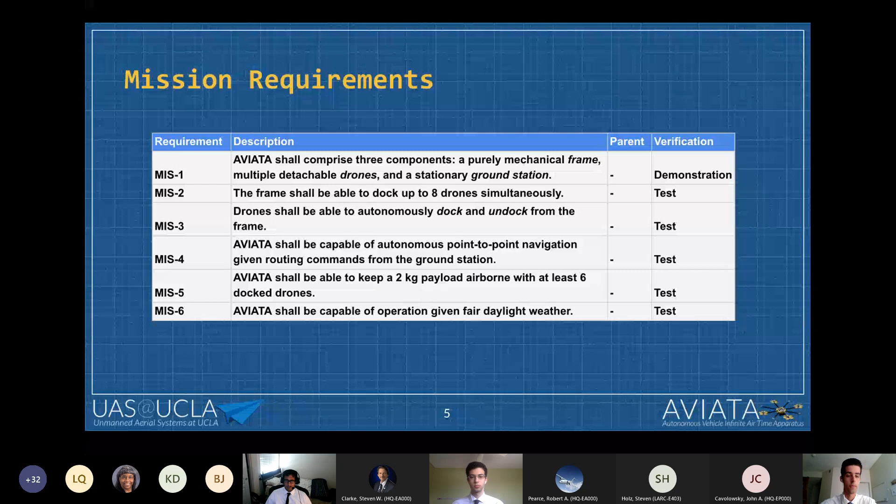In terms of how we organized ourselves, we broke it down into 4 main sub-teams in order to address each of the major issues more accurately.

The airframe team was responsible for the mechanical engineering of our unique structures. The control sub-team was in charge of handling stable flight control of rigidly attached drones, which affects the control of flight.

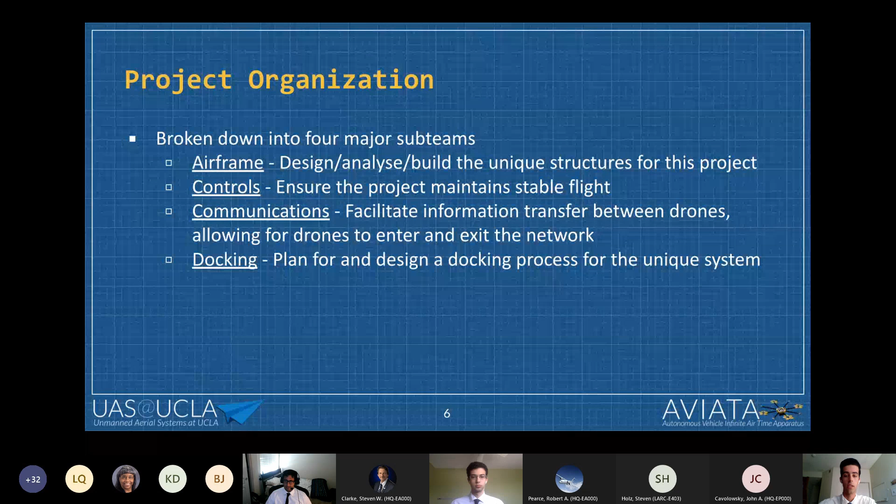Communications was in charge of facilitating information transfer by administrating a network for the drones to communicate with each other. And finally, the docking team was in charge of designing and implementing a docking process for drones to be able to switch in and out of the system autonomously.

A brief timeline of some of our work over the past year: our proposal was accepted in July of last year, and we completed crowdfunding in October, during which we raised just over $2,700. In October as well, we had our preliminary design review where we invited professors and alumni to review our initial concepts for AVIATA.

We used that feedback over the latter portion of last year to complete our early designs and simulations by December. That enabled us to purchase major hardware in January to start physical testing, and we presented some of the early results of those physical tests during our critical design review in February.

Ever since then, we've been doing a series of design refinements and more testing, and we achieved some significant milestones in May where we were successfully able to fly 4 rigidly attached drones, as well as complete a stationary docking test, which we'll be showing.

And here I'll let Brugu go into more detail about the mechanical engineering portion.

Hello, I'm Brugu. I'm one of the airframe directors of UAS, and I'll be talking about some of the airframe parts of this project. The role of the mechanical and airframe team is essentially to create the physical swarm system that the controls and software team are going to be interfacing with.

Our primary objective is to make it as robust and simple as possible, given that the controls and docking implementation are the most nuanced aspects of the project that we want to let shine.

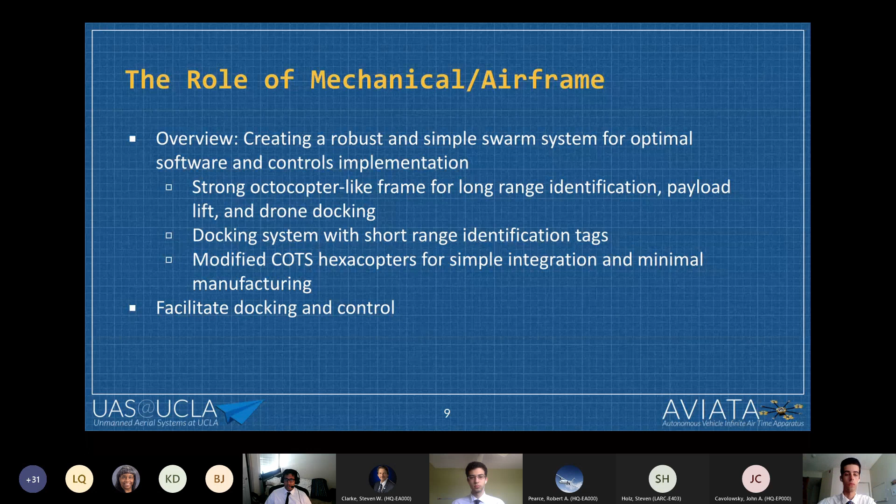This is the overall central frame of the system. In the center are 2 carbon fiber plates sandwiching 8 square tubes that come out of the center. On top of those carbon fiber plates is a large AprilTag target that's used for the first stage of docking.

At the end of each of those tubes is a docking joint with a cone section and a cylindrical section. The cone section allows for a little bit of tolerance in the alignment by the docking team, and the cylindrical section contains the platforms necessary to perform the actual docking. We'll go into more detail about that a little bit later.

Underneath those central plates is a payload box where we can insert our 2-kilogram payload.

Our goal is to have the entire frame be unpowered, so no batteries or anything are required for that part of the system. All of the powered components will be attached to the drone itself.

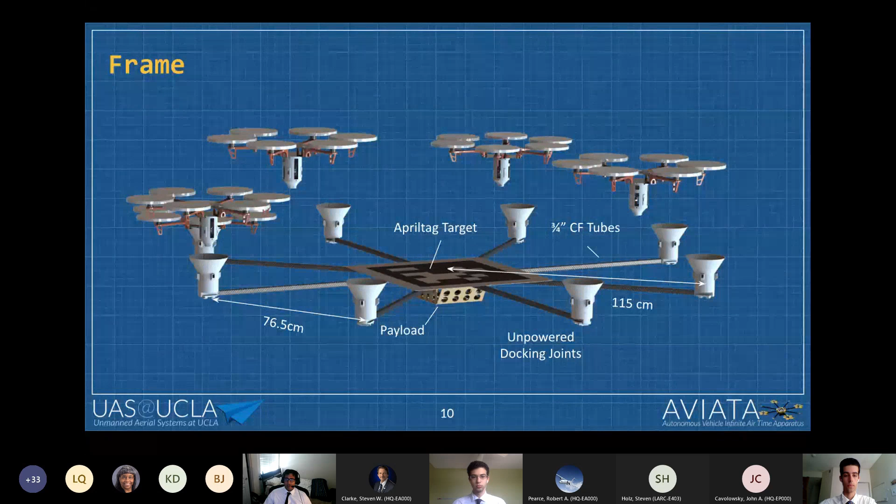Sorry about that, just had to clear my throat.

For the 4-drone test we performed earlier this year, we manufactured a separate frame with a 3D printed central mount and 4 symmetrical booms coming from the center. Those are the same booms we're planning on using in the final design.

All of the drones on the periphery are rigidly attached to that frame. It's different from the final design in that the drones cannot dock and undock, but it provides a useful tool for the controls team to control a multi-drone system. We'll discuss the results of that later on in this report.

Here's a docking mechanism we had previously designed up to our CDR. It has 2 funnel-like structures which would be attached to the frame, and rack and pinion structures that would be attached to the drone itself. 2 servos would actuate those pinion gears to push the racks into the funnels, and that was our previous method of docking and alignment.

We had some success with that, but upon review from our critical design review and advice from professors, we decided to switch to a different design, one that had fewer mechanisms of failure and was generally simpler in design.

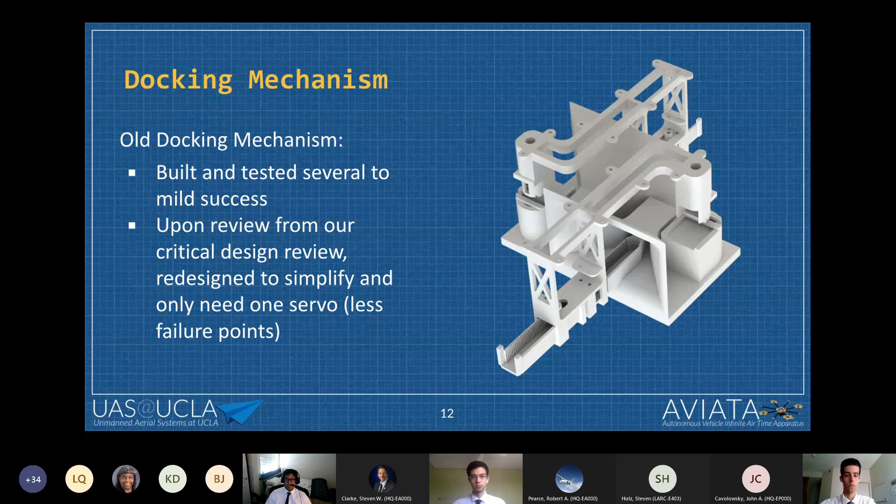In this next slide, we see the current docking mechanism we're planning on using. The bottom structure has a large cone, which allows some tolerance in alignment, so that even if you're off by a little bit, you should hopefully slide into the proper orientation.

There's an alignment feature at the bottom of the docking mechanism attached to the drone itself, which corresponds to another recessed alignment feature in the bottom of the cylindrical section, so that as you yaw the drone, you should drop into that recessed hole.

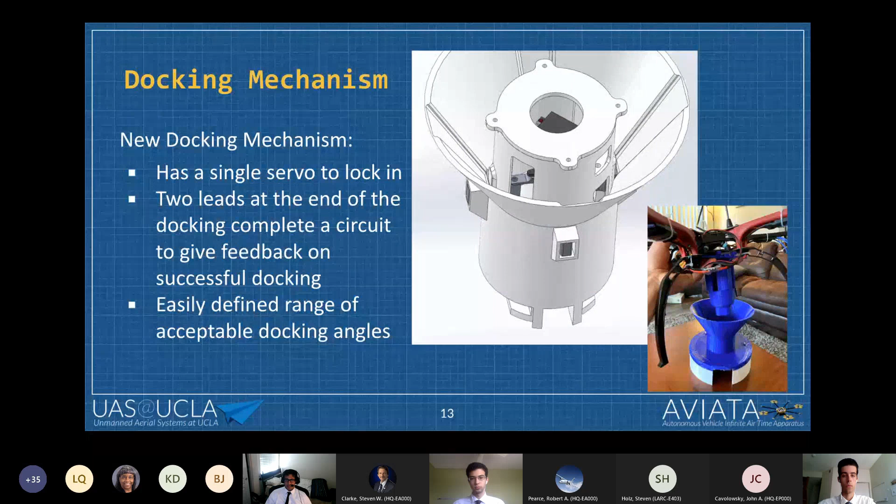At the bottom of that alignment feature, there's actually a metal contact at the bottom of the cylindrical section that completes a circuit within the drone, confirming that docking has been successful. But we'll discuss that a little more later on.

Finally, we generated a risk matrix for the system. On the right, the horizontal axis is the severity of the failure—left is least severe, right is intolerable severity. The vertical axis is the likelihood of the failure—less likely on top, more likely at the bottom. We rated some of the subcomponents of our mechanism or system using this risk matrix.

The coupling of the docking mechanism, we rated an 8. Coupling means the ability to either successfully dock or undock from the system. If there's a failure in that, it could cause a pretty significant impact on the performance of the system. But we decided that because there are other potential docking points—2 others that could be used to fly with the payload—it's not necessarily a catastrophic failure since there's sort of a backup.

We decided the same risk was present in the strength of the docking mechanism. If that joint mechanically fails, it essentially has the same risk of knocking out one of the potential docking joints.

For the frame strength, we have a lower risk because it's less likely to break, although the risk if it did break would be essentially the same as one of the docking mechanisms no longer being available, along with a few other complications for the controls team to deal with.

Then we have oscillations in the frame. This is something we did end up seeing and will discuss later on, but with some of the software changes we made, it should not be a super likely event that the drones on the end cause oscillations in the frame.

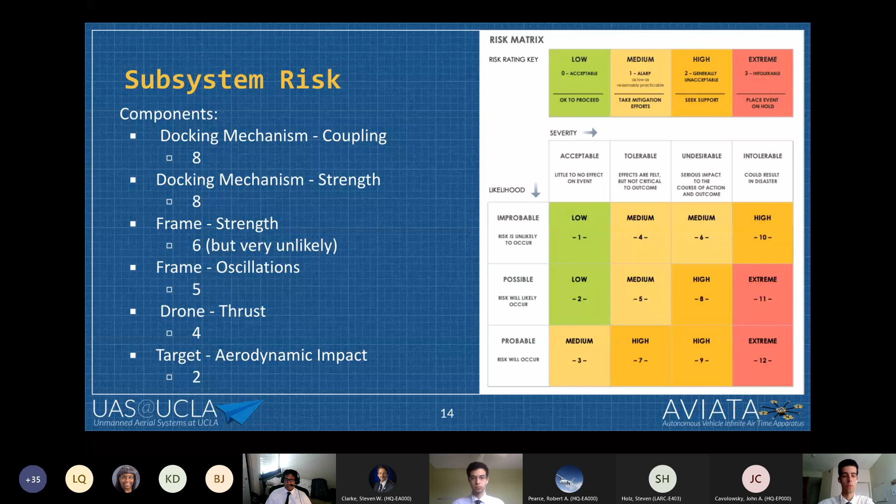The thrust of the drones should be sufficient to fly in most conditions, so we don't believe that's going to be a super high risk factor. And the aerodynamic impact of that large central AprilTag, we don't believe will be a very large risk factor either.

Finally, we have some future considerations for our airframe. You may have noticed that those docking joints at the end of the frames are quite large, so reducing the size of those is one of our main goals. The reason it's so large is because we want to provide as much tolerance or leeway as possible to the docking team for alignment via the computer vision system. But there's still a lot of room to reduce that size and weight.

We also need to check its robustness in flight to make sure the drones don't slip out during flight. Increasing the frame strength, we have a few concerns about the strength of the central frame, which we think could be addressed with additional support beams or by increasing the size of the booms that come from the center. We'd also like to perform more aerodynamic testing of the entire 6-drone system in flight.

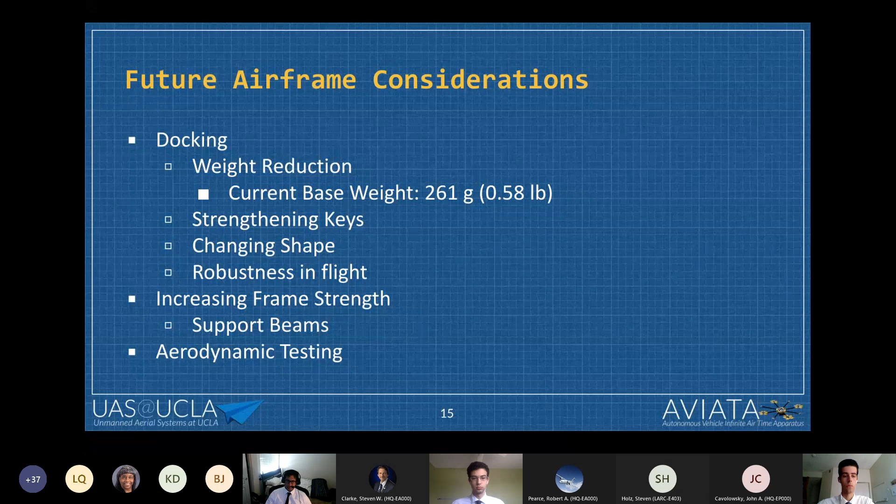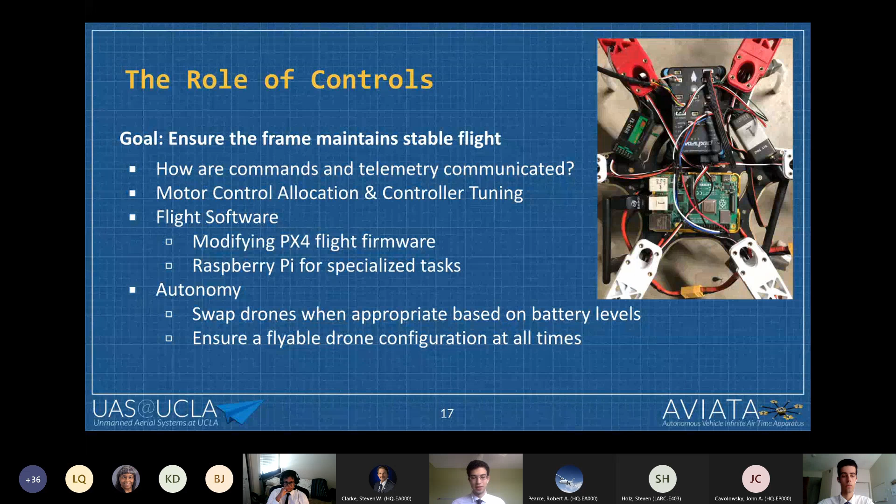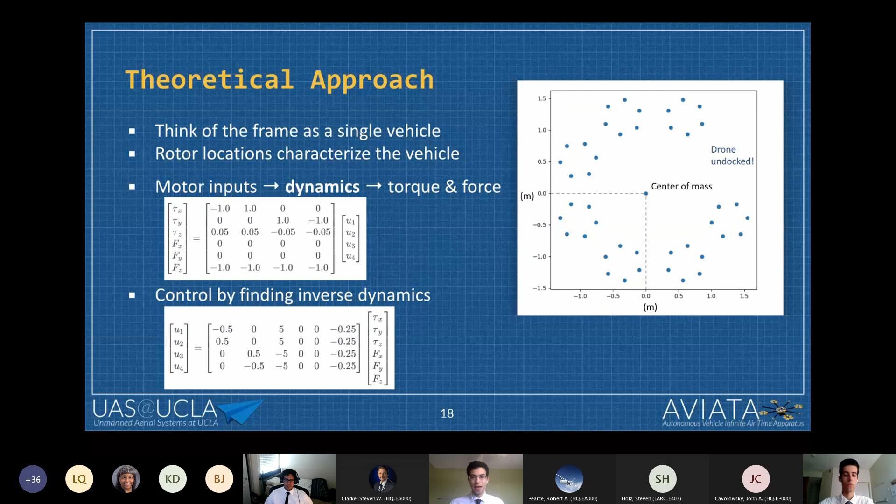The approach we're taking is starting by looking at the frame as a single vehicle, where the locations of the rotors and the properties of those rotors characterize how the vehicle flies. We want to think about the physics going on here, where you give each motor some command for some speed, and that results in a resultant torque and force on the entire rigid frame. So whether it's multiple vehicles or one vehicle, the way you control something like this is by inverting those dynamics and deciding how you're going to actuate your motors to accomplish your goal torque and your goal force.

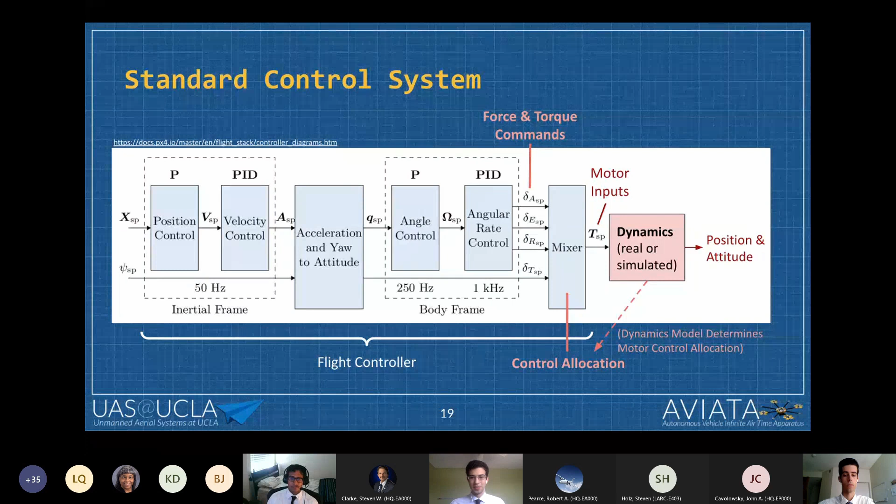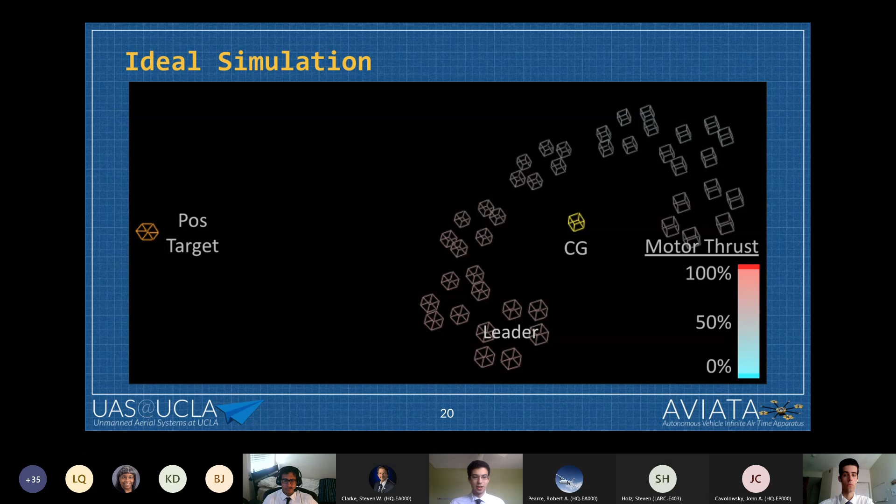There's obviously room to add disturbances, but the feedback we do get right now is the motor thrust, showing the locations of each rotor on the frame, changing color based on how much thrust - more red if the motor is getting a faster motor command, more blue if it's spinning slower. Here we've implemented a position control similarly to how it's implemented on the real flight controller.

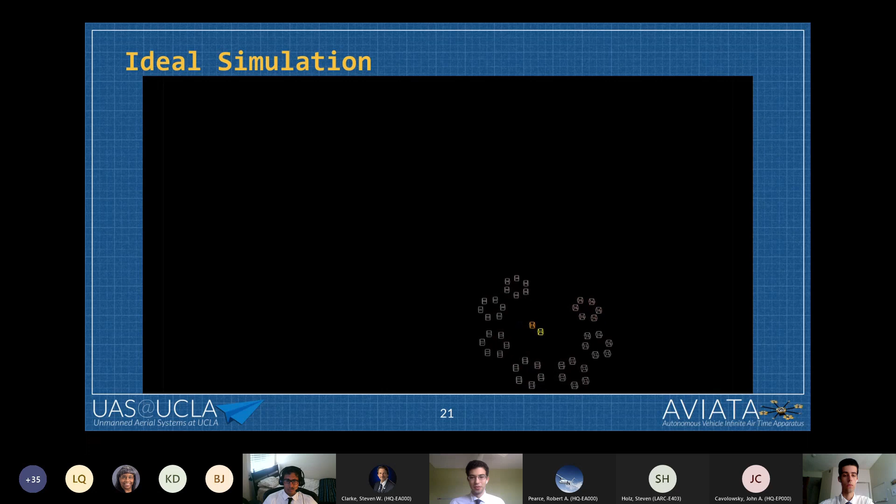Here's a video of that, and I'm just moving around the orange dot with my keyboard arrow keys - very simple - and the drone is using its position control to go follow it. I'm also manually making drones disappear and reappear like magic, so obviously it's like magic in here, it won't be in real life. But what it does accomplish is showing that the system is flyable in several different configurations.

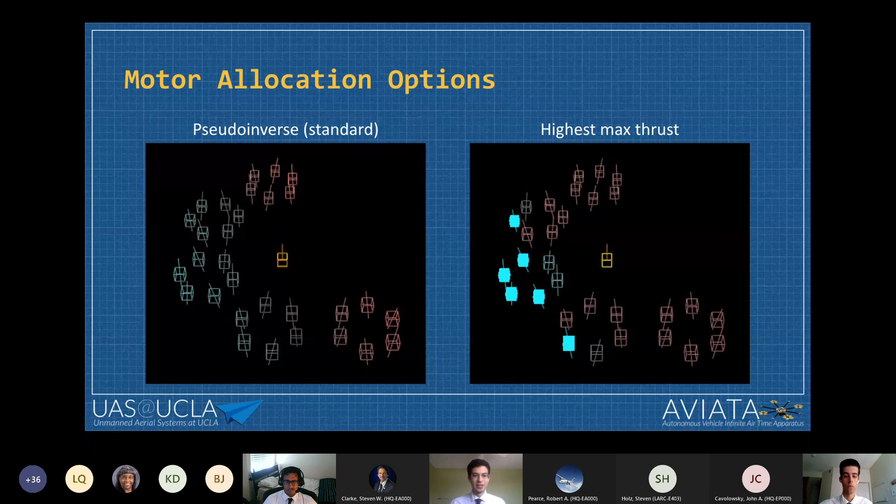But in summary, there are literally an infinite number of ways you can map your torque and force commands to your motors, and so deciding on one is not simple.

So now let's get back to the real world a little bit, where we have to recognize that we are controlling this with multiple vehicles, and they are communicating wirelessly. The way we're accomplishing that is by assigning one drone to be the leader, so it manages position control, and through its controllers generates an attitude set point, which it sends to all the other drones. So then all the drones share an attitude set point, and then they control that independently.

A few add-ons to this are some simple transformations of the attitude set points based on the orientation of the drone, because they're just docked in different orientations. A more interesting problem is handling possible discrepancies between the attitude, if there's mechanical imperfections in the structure, and especially a case we're considering is if there's bending, because the drones are all pulling up on the ends of the structure, so there could be bending causing the drones to be tilted relative to each other.

That's something we've thought about. We've come up with some solutions for robustly taking care of this or addressing those situations, but we haven't implemented it yet, just because it is a lot of work to do so. And it is flyable, nevertheless, with what we have accomplished so far.

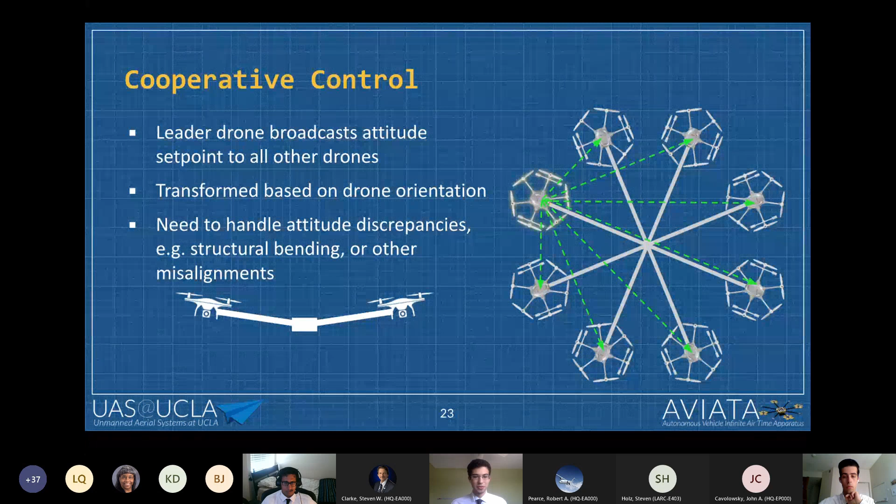So this is showing just how that controller diagram I showed earlier is split up with the leader and follower system. So it's simply showing the leader drone doing position control, and at the point where it makes its attitude set point, it will send to all of the follower drones, and they will independently execute attitude control.

Right now you can see we're sending these at 50 hertz over the network. So the attitude set points are sent at 50 hertz, and that's because that's the default rate of this controller in the flight firmware. So far that seems to be performing well.

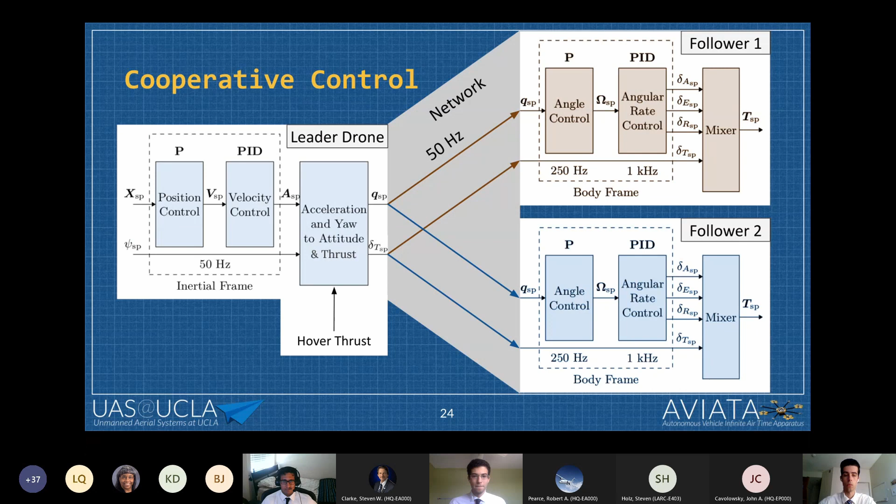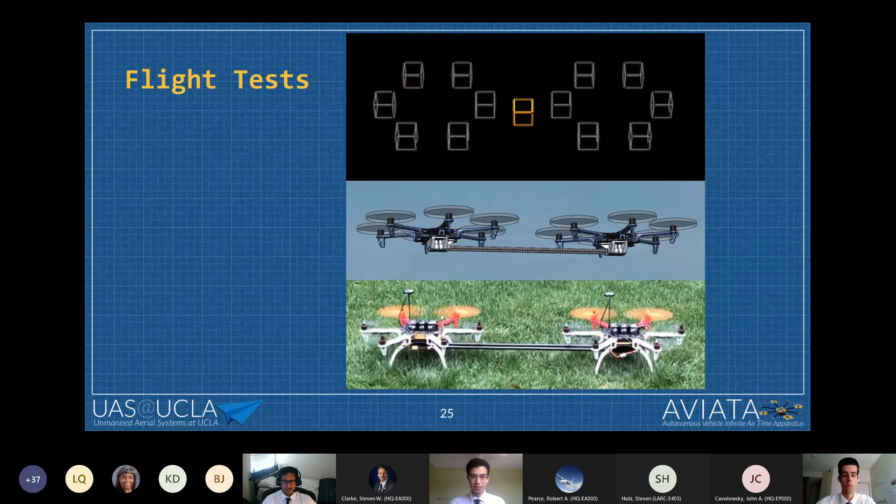Now I will present some real flight tests. So that's exciting. We took baby steps and started with just 2 drones that were rigidly attached, basically one of the smallest systems we could build to prove that this concept works.

These videos are showing a comparison between the attached drones trying to hold position and comparing it to a single drone holding position. You'll notice that the drones attached to each other aren't doing quite as good a job as a single drone. Luckily, there are a lot of things we have been able to improve since this very early test.

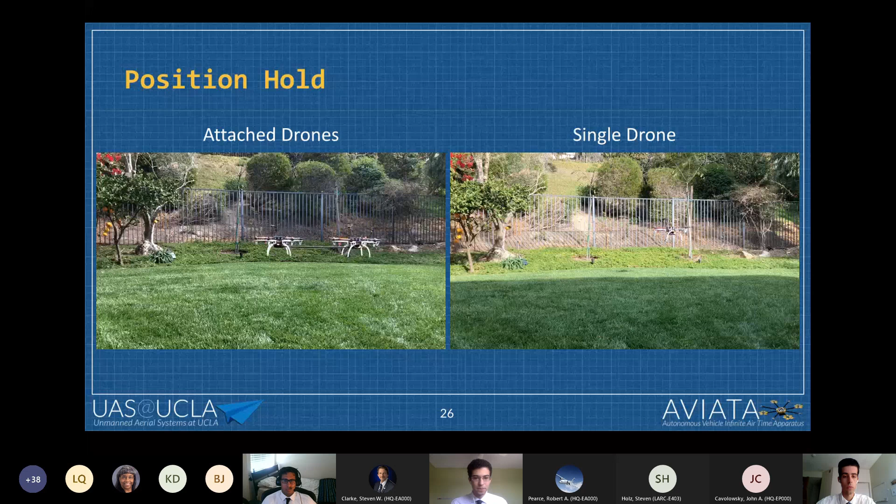So a few lessons we learned from this early test: one, that we did have adequate roll and pitch control of the vehicle, and so we were happy about that. However, we saw insufficient yaw control. The top right is just showing an image of the motor signals saturating due to the drone not having authority over its yaw angle.

So with the help of one of our advisors, we decided to tilt all the motors, and this allows flight similar to if the motors are mounted normally. However, it increases the ability to generate torque in the yaw axis. We decided on a tilt of 10 degrees because this was a good trade-off between being able to apply torque in the yaw axis and not losing very much thrust at all in the vertical direction. In fact, we get around a 7-fold increase in torque in the yaw direction, so that is very helpful.

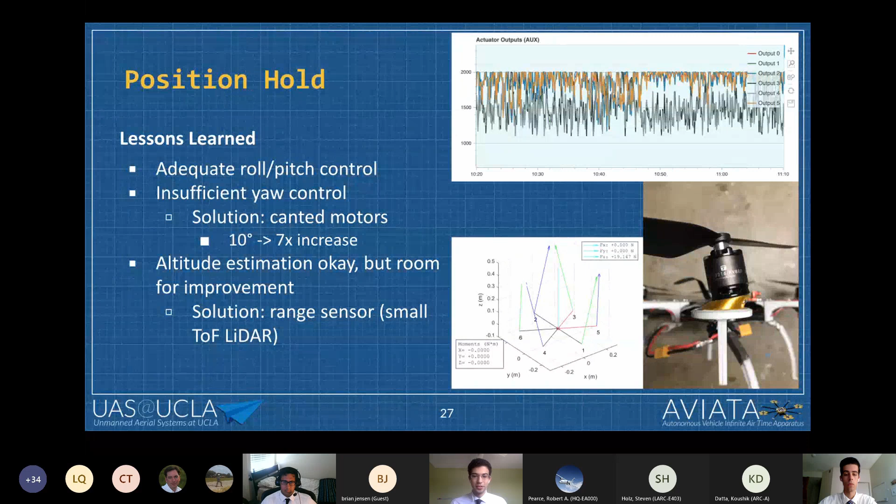We weren't super happy with the altitude estimation provided by the standard barometer and GPS, and one of our advisors recommended trying out a range sensor just so we have a better measurement of the distance to the ground. That's another thing we added after this. So this is another test showing those measures in place, and hopefully you can recognize a little bit of improvement. This also shows the ground station on the left side of the screen.

The summary here is that the canted motors were able to accomplish good yaw control, and it was able to maintain a consistent altitude. Another thing this is testing is transferring leadership from one drone to the other, and that's happening right now. You can see it dips in altitude a little bit.

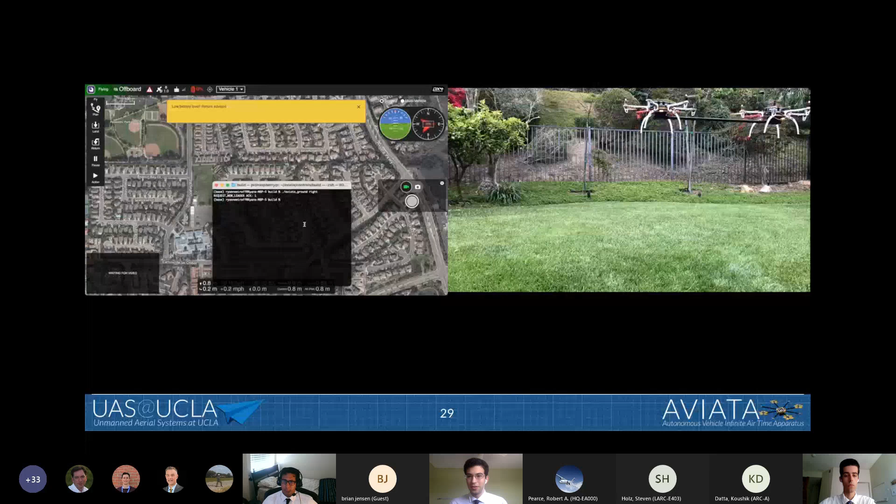Just to clarify, when I say transferring leadership or leader transfer, I mean that the drone that is leading, doing position control and sending set points to followers, is passing off its role to a different drone. In the case of these two drones, they're swapping roles. That's important to be able to do, as drones are going to be constantly docking and undocking to the frame. So we saw good success with that. But you saw the dip in altitude, which theoretically is straightforward to fix, but I think we need a little more testing to figure out if we've done that properly.

As mentioned, the measures we took after the previous test, like the canted motors and range sensors, were successful and did what we wanted them to do. We did the range sensors partly because we thought it would be helpful if eventually we did docking in flight, if it was a little more stable in its height above the ground for the purposes of docking. Another thing to mention is that there's certainly room for improvement in tuning the controllers, like the PID gains and other parameters. This is just something that takes time, and we're certainly not experts at by any means. So there's certainly ways this could be bettered in software for control.

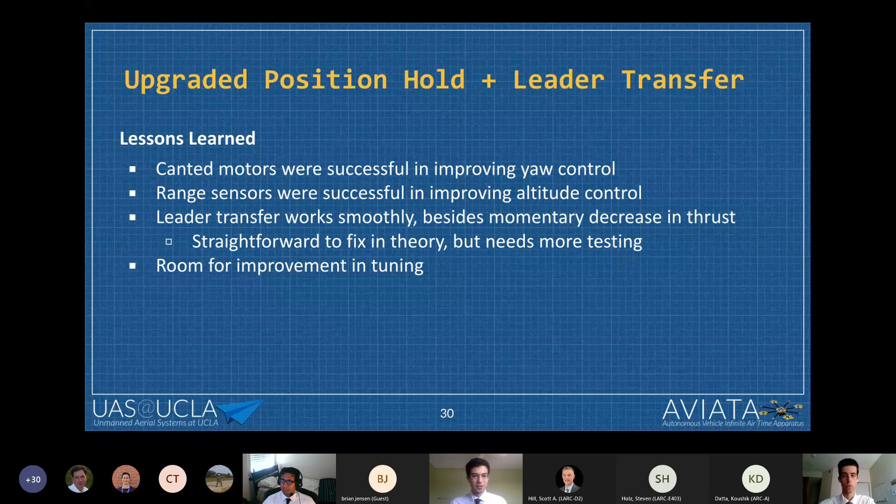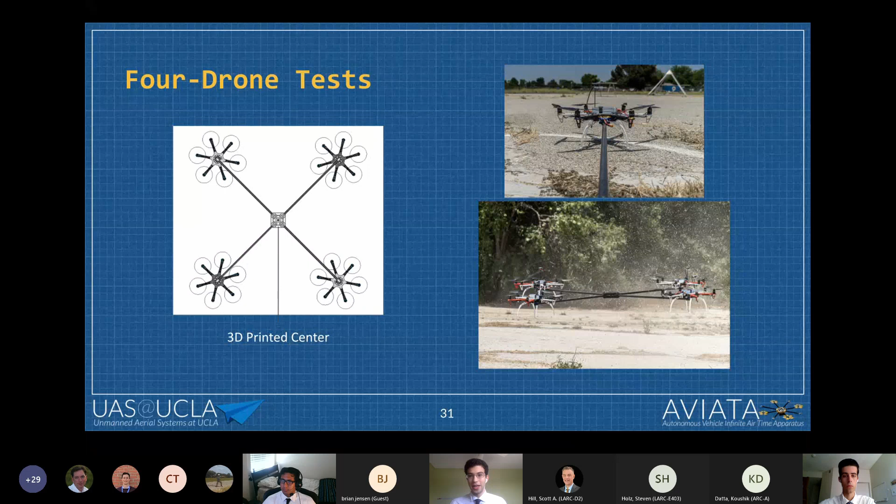So now let's move on to the 4-drone tests. This structure is more than twice the diameter of the 2-drone tests, so it's quite a large upgrade.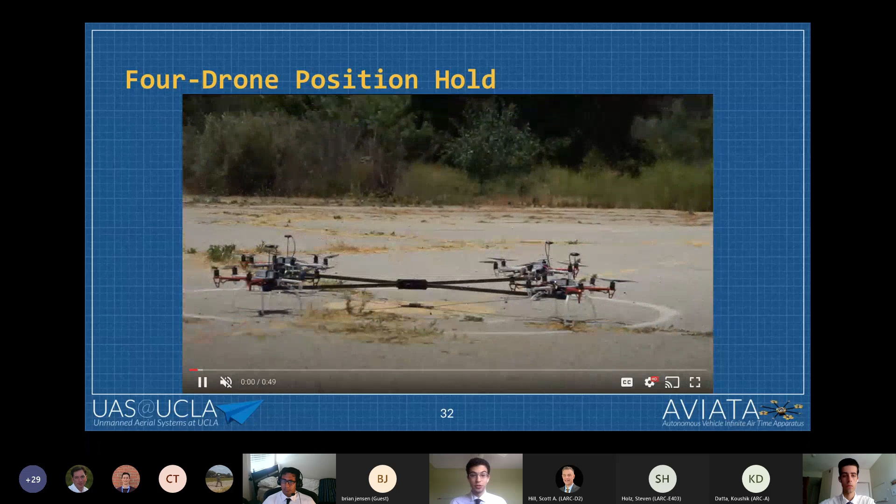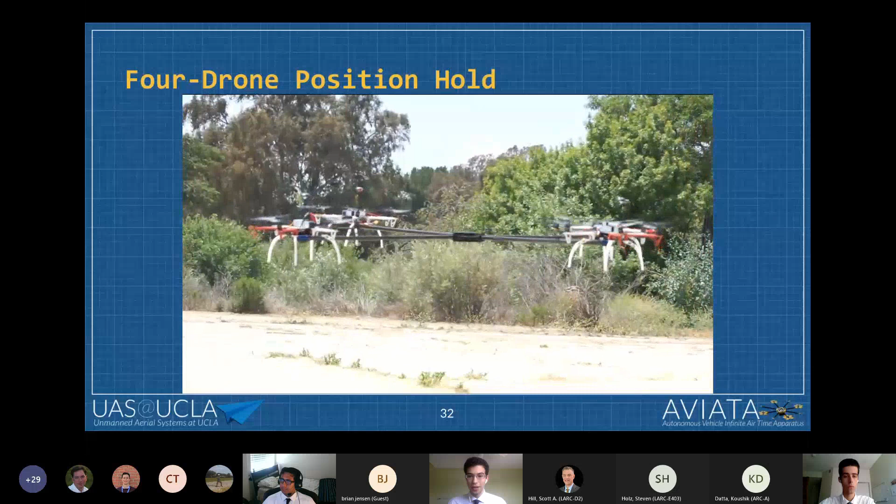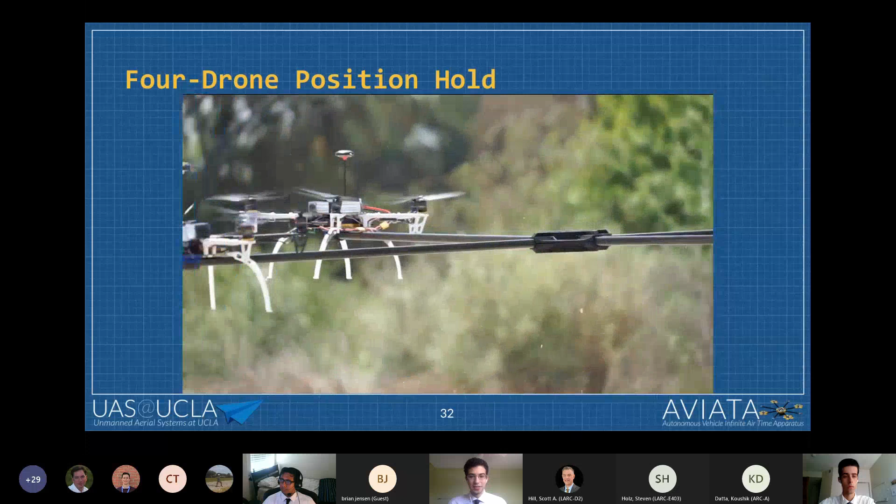I'll show position hold again. Unfortunately, we didn't get too far past just testing position holds with this system. These tests are relatively recent, and at some point we have to say it's good enough. But you can see it's performing fine. On the surface, it's able to hold position. What you can see there a little bit is the drone shaking, and I'll talk about that in the next slide. In a second it will become a little bit unstable, and that's another thing to mention right there.

The lessons learned from this is that the motor allocation we were using was causing the drones to apply a lot of torque to the booms, causing torsion, and that led to oscillations around the booms. That was interesting, but definitely something to expect. I talked about the motor allocation before, and we think that changing the motor allocation to something more standard would help reduce that torsion. So we implemented that before the next test.

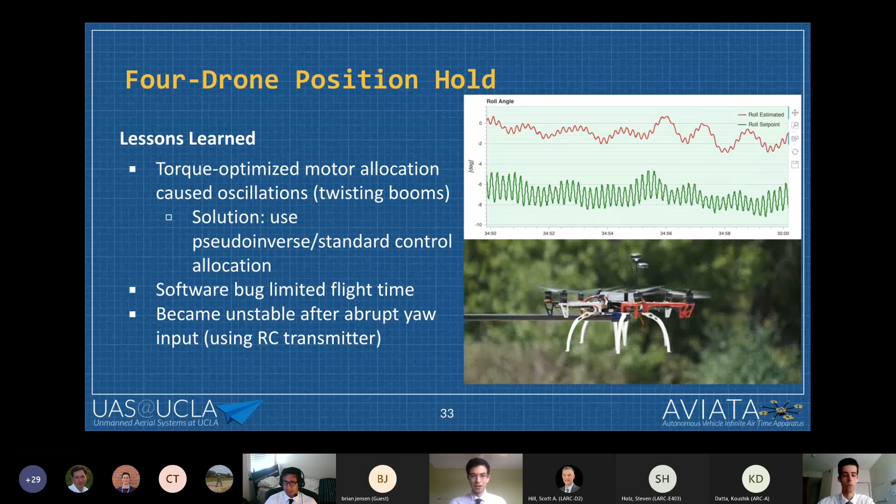There was a software bug that limited our ability to make long flights here, so we didn't get a whole lot of data. Additionally, the instability in this test was due to an abrupt yaw input from me controlling on the RC transmitter, and that's certainly something to look into. That just, I think, is pointing to the fact that the tuning of the controller could definitely use some work.

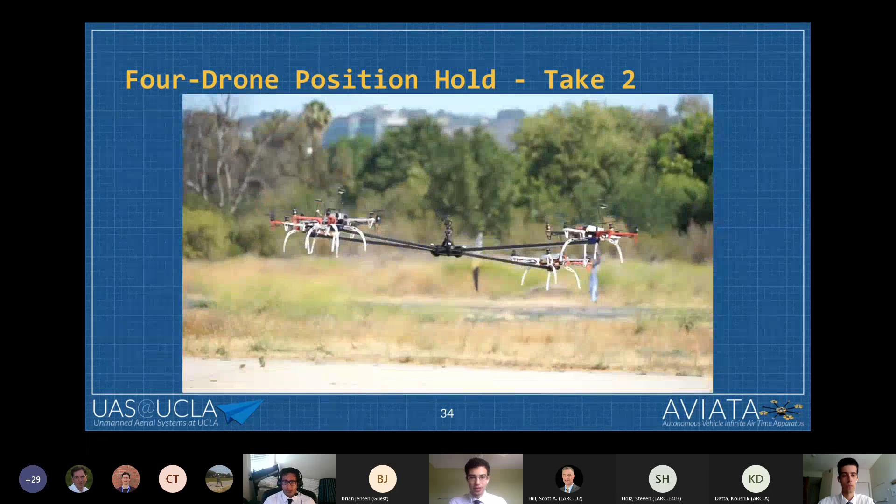So this is the last test I'm going to show, and it is another try at position hold with the structure. You can see that this flight was relatively short, and if you notice, the booms look a little bit out of whack or at different angles in this test.

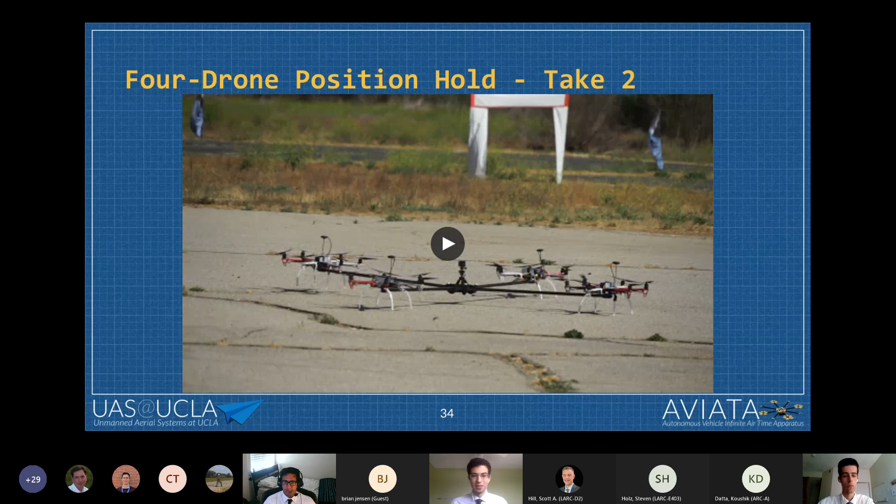That is because in a test just before this, there appeared to be an anomaly in flight. It could be... we don't know what caused it, essentially. So we had a hard landing, and it actually cracked the center 3D printed support, and that caused a lot more bending in subsequent tests.

One thing good about this test is that we didn't see nearly as much oscillation on the booms, so that was good to see. Additionally, we don't know exactly what caused a hard landing.

This test was conducted last Friday, so we haven't had time to look at all of the data from this. But we do get a lot of data in logs generated on the drones, and because of that crack in the 3D printed center support, we accidentally revealed that stability was good in the subsequent test. We didn't have that specific problem in the subsequent tests, and we saw good stability even with that bending, which was good that the drones were able to compensate for that.

We did see thrust decrease shortly after takeoff. That's why the flight was short. That's another thing we have to look into. Obviously, flight didn't go as ideal as we had hoped, but that's the way things go. But we do have some data to look at to figure out what happened.

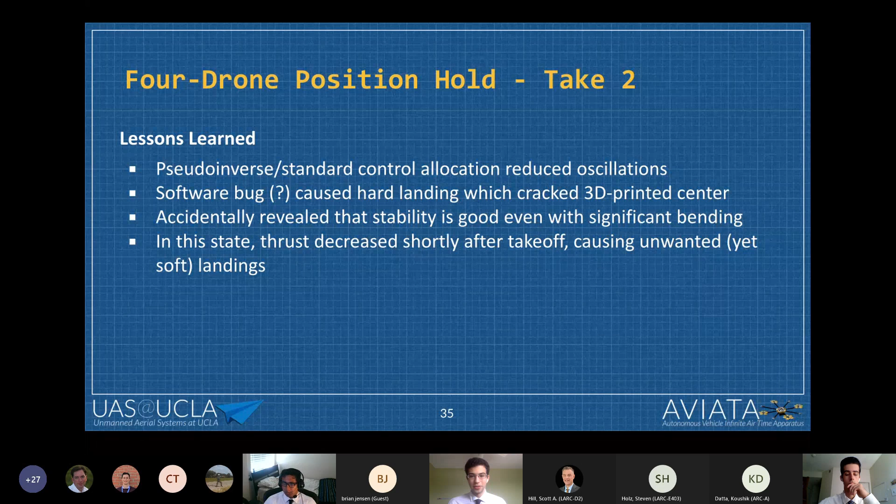So to conclude this section, do we have confidence in this rigid structure, or this mostly rigid structure, to fly stably? Yeah, we definitely do. We definitely demonstrated that we can fly and hold position relatively well up to a moderate breeze. And of course, that's my qualitative assessment of the wind on some days that we flew.

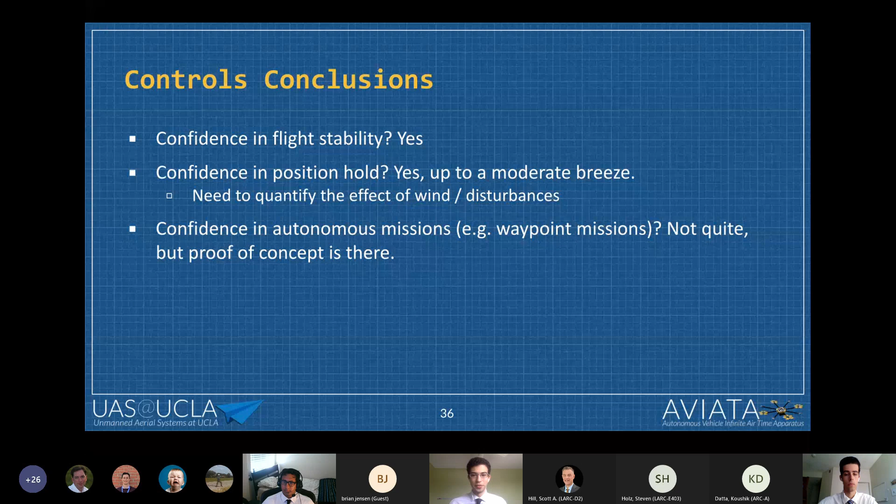obviously autonomous missions are one thing that we'd love to be able to accomplish eventually, which we didn't quite get to actually demonstrating, something like a waypoint mission, but the proof of concept is definitely there. And I think if we do decide to move forward and work on this more, we could definitely accomplish something like a waypoint mission.

I'll talk briefly about the communication system we're using. So all the controls code is kind of taking for granted that the drones can talk to each other wirelessly with relatively low latency. The goal of the communications subteam, which another member worked on but wasn't able to come to present, was basically to provide reliable wireless communication between the drones.

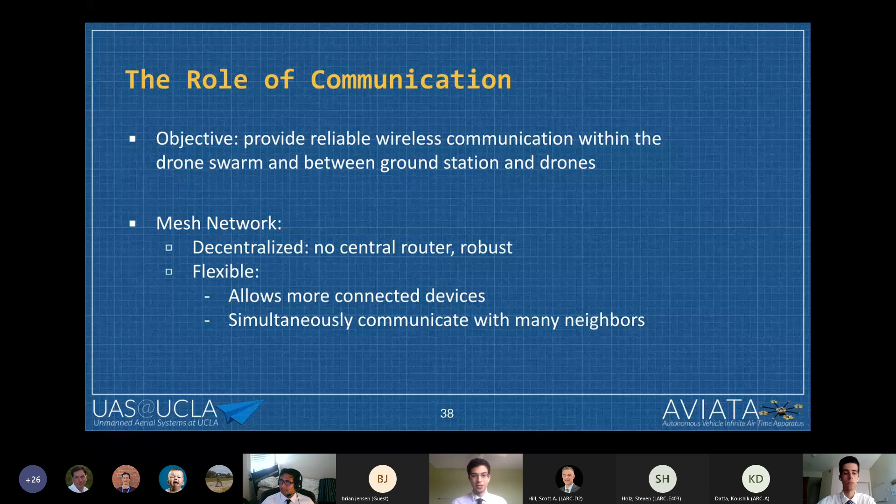We're using an ad hoc or mesh network, which is decentralized, so there's no central router, and this provides a lot of flexibility. What we're using is Optimized Link State Routing Protocol version 2, or OLSR v2, which has a corresponding RFC. There's an existing implementation of this that we're using, and essentially it operates on OSI layer 3, the networking or routing layer, and it controls the network topology and manages detecting new neighbors that get powered on. So it will be able to adapt or change the network topology on the fly as drones enter and leave the network.

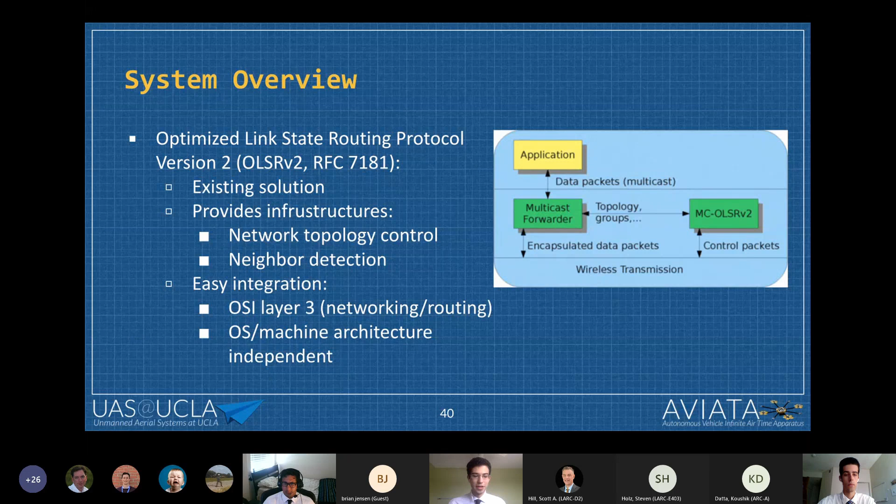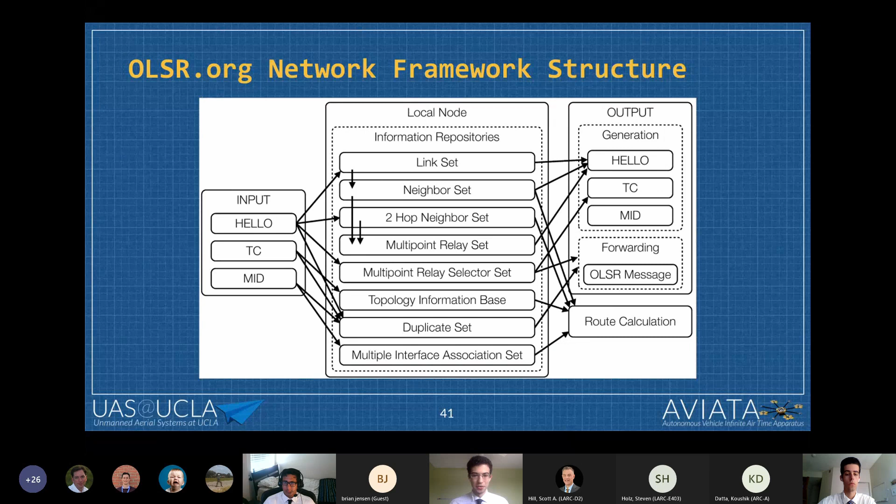This is a flowchart kind of showing the structure of the framework. I'm not going to go over this too much because I personally don't have much knowledge on what is going on here, so I apologize for that. I'm not sure if our networking teammate is here, but if he is, he certainly may be able to answer some questions.

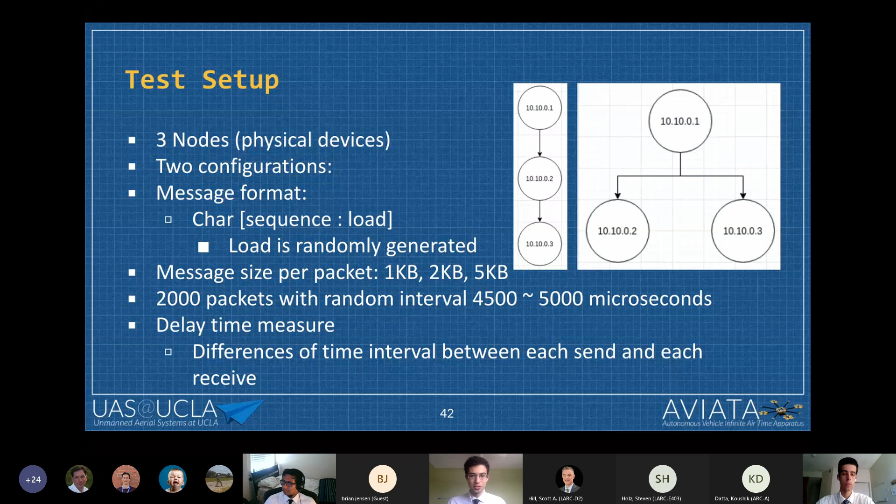So we did do some tests separate from the drone system to just test the network, and we conducted some tests with different packet sizes and an interval around 5,000 microseconds between packets. This is actually a very high throughput test, much higher than we're actually using right now in an actual implementation. So what we've measured here is the delay time of each packet in microseconds.

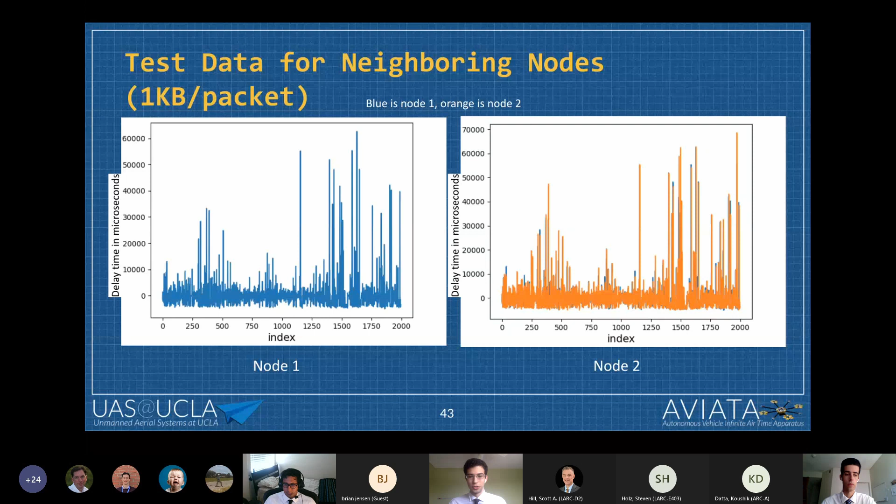So of course this is good news. I think the performance we've seen from communications testing shows that it's definitely adequate for anything we might do in flight.

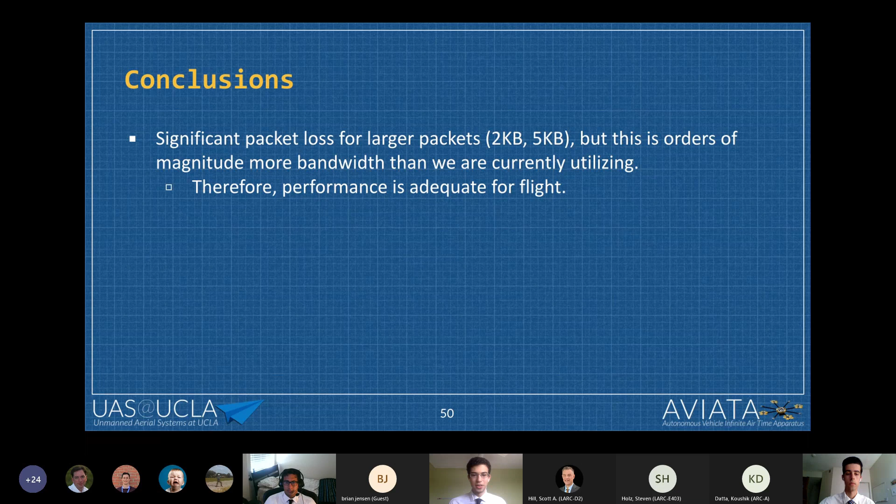One thing to mention is for the controls code, we're using ROS2 to manage communications, and that requires working a little bit with the mesh network to make sure that it cooperates well with that. There are some measures we've taken, like disabling multicast for ROS node discovery, and that's not a super important detail right now.

But the summary is we have configured ROS2 to act appropriately and work on the mesh network. Now I'll hand it off to Axel to talk about docking.

Yeah, so I will be talking about the docking subteam. The role of this subteam is to use the structures that Brugu and the airframe team constructed in order to determine and implement a process for getting drones to and from the system.

So the general idea is to use GPS to get from the ground station to the general area of AVIATA, and then switch to a computer vision aided system for more fine control to dock, which needs pretty high precision. And this process is completely autonomous.

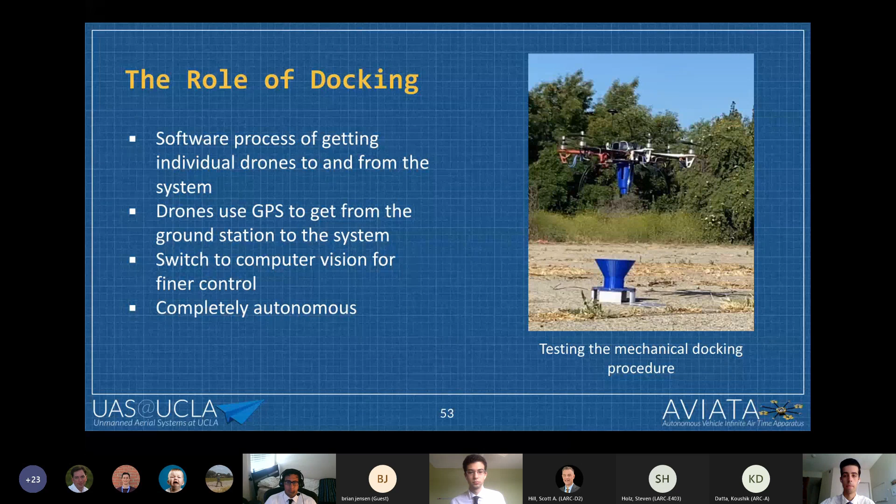So in terms of a general control flow, to understand what it is we're doing: once we get the docking command, we'll take off and fly to the swarm using GPS. Once we're within range of the swarm, we actually switch to that vision-based system. The reason for that is that GPS is not accurate enough to dock with the centimeter level precision that we need.

And so therefore we have a bottom mounted camera that faces down, and there's a target near the docking joint to enable us to accurately control the drone. The general flow is to process an image and try to detect the target.

We check the errors, meaning the X, Y, Z, and rotational position of the drone relative to the target. If those errors are too high, so we're not within range, then we update a PID controller to adjust our velocity set points. If the errors are low enough, then we attempt to dock and then finally join the swarm.

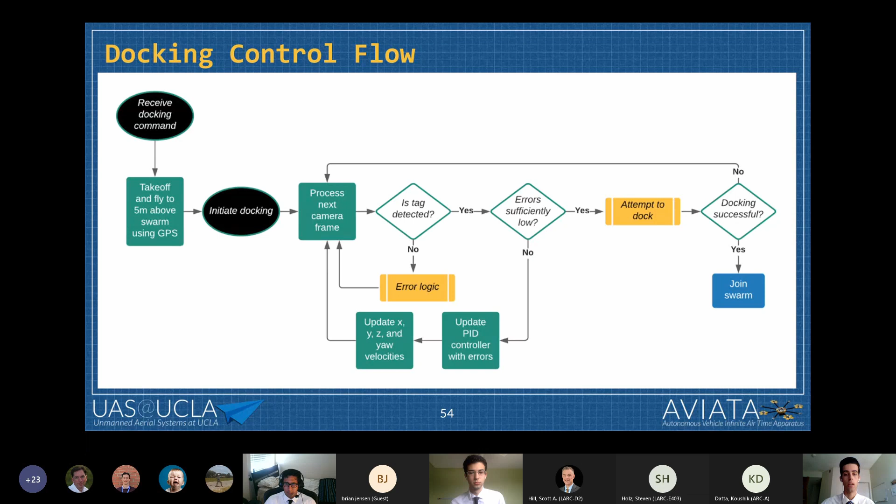So some technical context for this: the targets that we're using are called AprilTags. This was a research project at the University of Michigan to develop a visual fiducial system, which is basically artificial landmarks that enable us to get a lot of positional information from an image. An example of that is on the right - they kind of look like QR codes.

We also created a simulation for this docking process in the early stages of this project, which was very useful for early testing and trying new things without needing to go out to an airfield and try untested code on a drone. For that, we used Gazebo, which is a 3D drone simulation software.

In terms of our physical environment, we have the Raspberry Pi 4 on the drone, which is what Ryan mentioned, and we're using the standard Raspberry Pi camera, and everything runs in C++.

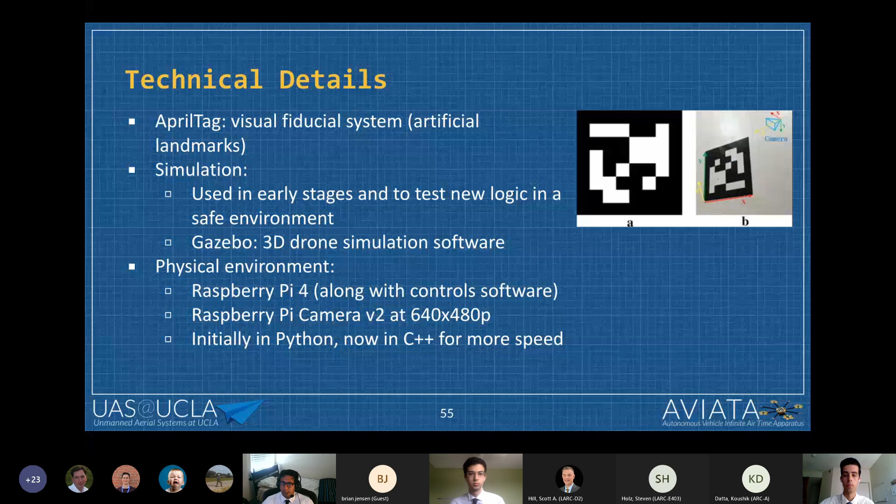So the first problem that we had to solve with docking is the trade-off between target size and how far away we can be in order to detect it. The trade-off is that the target needs to be small enough to fit in the camera's field of view at close range, but also needs to be large enough to be detectable far away.

The GPS gives us an accuracy of about 2.5 meters, which we can reduce with RTK GPS, but we'll still need a certain level of detection, which is why we went with this two-stage docking approach. The idea is to have one large target in the center for the initial approach, and then close range targets on the periphery at the docking joints for the actual docking procedure.

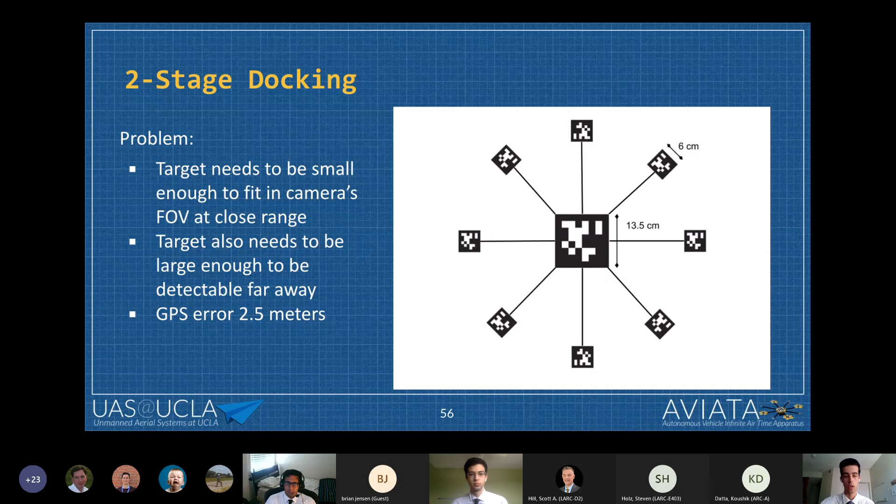So if we go to the next slide, we'll see the first stage of docking, in which we use the central tag to align close to the peripheral tag. The drone also rotates to be able to use the full horizontal field of view, which is greater than the vertical field of view. Once we're able to detect both targets simultaneously, we can transition to the second stage of docking.

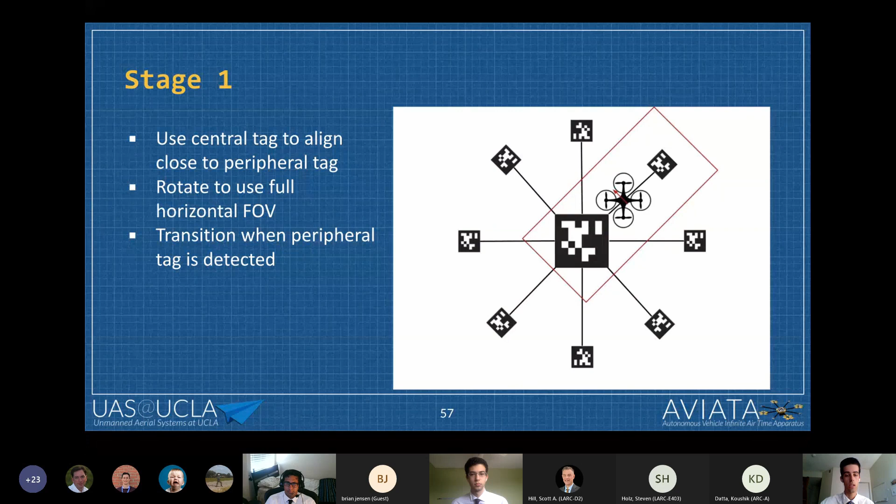Which is just normal docking, in which we try to get as close as possible to the target in order to dock within the cone. That cone has about a 9 centimeter diameter, which gives us a fair amount of tolerance for the final stage.

I also want to briefly mention failure handling. Failures will happen when the target is out of the frame of the camera. After some testing in the simulator and some real testing, we found that the easiest solution is to simply ascend to increase the area in each camera frame while moving towards the last detection.

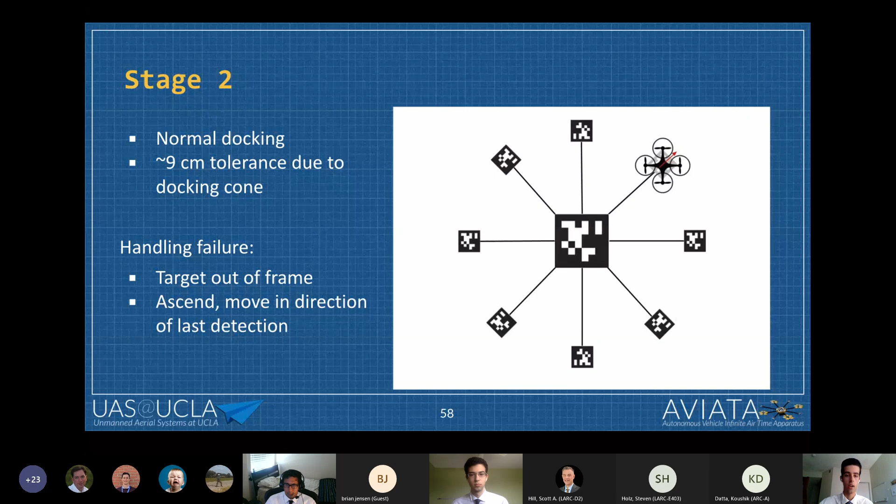This does get very tricky with some unpredictable wind gusts, especially when we're really up close when centimeters matter. So wind sensitivity is something that we've had to struggle with a little.

Briefly, I want to mention an unsuccessful previous concept. We originally broke up our multiple stage docking into 3 stages, in which we would simply try to hover over the central target and then fly to the peripheral target. Unfortunately, that second stage was problematic because we didn't have any feedback during flight, and so it was too unpredictable in getting to the third stage. So we decided to modify our first stage to use the central tag as a positioning tool.

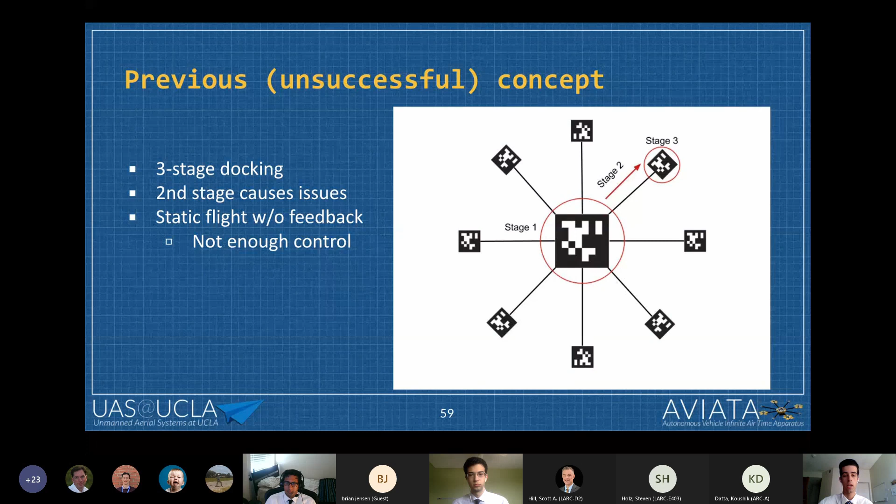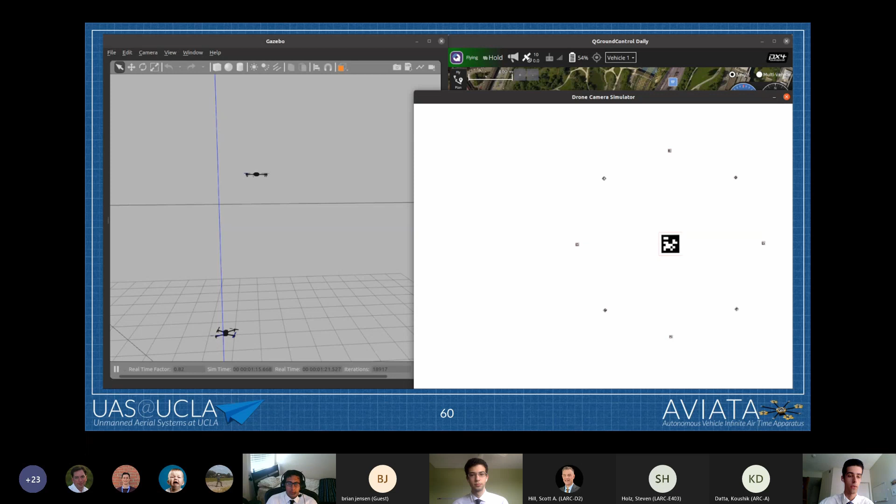Here we have a quick screen grab of the simulation that we developed. On the left, we have Gazebo, the 3D drone simulation software. On the right, we can see a simulated camera, so we can see what the drone 'sees' from its point of view. Right now we're seeing what the topmost drone sees, and it's attempting to dock with the bottommost drone on the left side of the simulation.

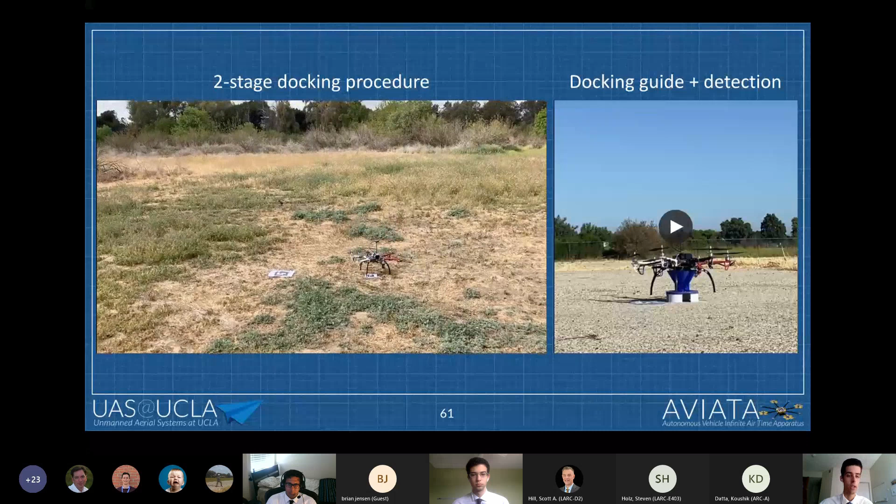On the next slide, we have some physical results to show as well. In the left video, we have our 2-stage docking procedure. We place the central target and one peripheral target on the ground, and the drone is trying to find the midpoint between the 2 targets, which is stage 1. You just saw it rotate, and it's transitioning to the second stage of docking and approaching the peripheral target. Once it sees that the errors are low enough, in this test it was trying to land on top of the target, and it was able to successfully do that, which helps validate that our multi-stage docking procedure is viable.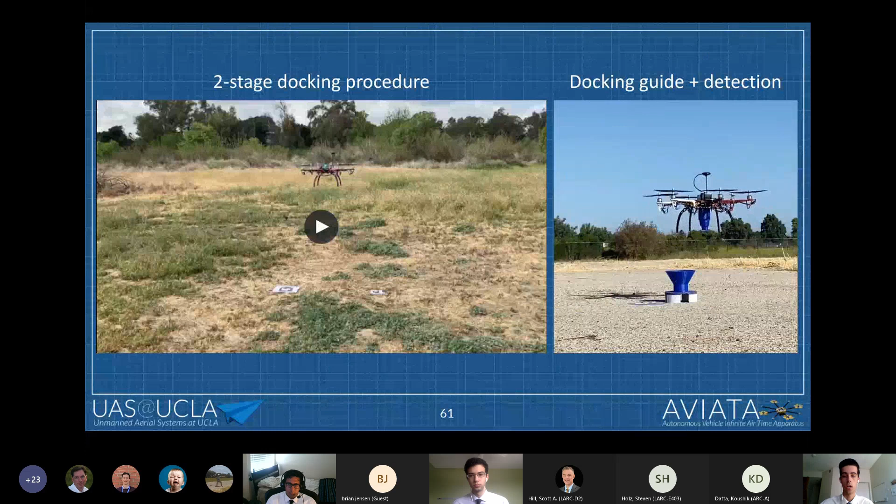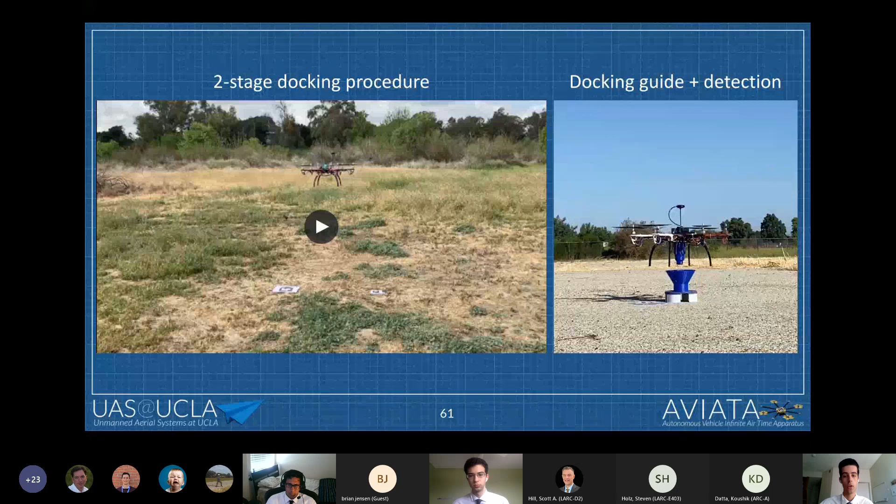On the right, we have the results of tuning the PID controller on the drone. The drone was now precise enough to be able to autonomously land within the docking guide cone and then afterwards detect that it was docked. Here you can see in just a moment, it's going to push against one of the edges of the cone and then slides in pretty nicely and slots in painlessly.

Moving to the next slide, I just want to acknowledge that this is nothing new, but we did do PID tuning for this control loop. We extract X, Y, Z and rotational error relative to the tag, and then use that to update the velocity set points. You can see that a lot of tuning needed to be done. Before we had very little stability, and afterwards it does take a little bit of time to dock, but we're able to get those errors low enough to dock with the precision we need. This shows the improvement. I'm definitely not an expert in PID tuning, but it shows that it's pretty decent for our application.

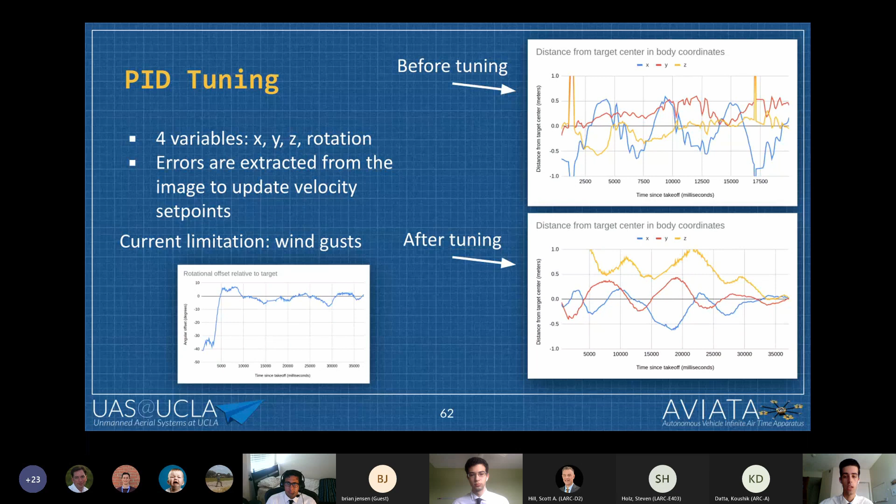In terms of testing milestones, docking-wise, we started physical testing once we finished simulations in January. Then in March, April, and May, we achieved some pretty significant milestones as stepping stones to getting to the final product. Currently, up next, we have to test the final docking mechanism, which we've manufactured. You can see here all the 3D printed components as well as the servo. All we need to do now is assemble it and try it out.

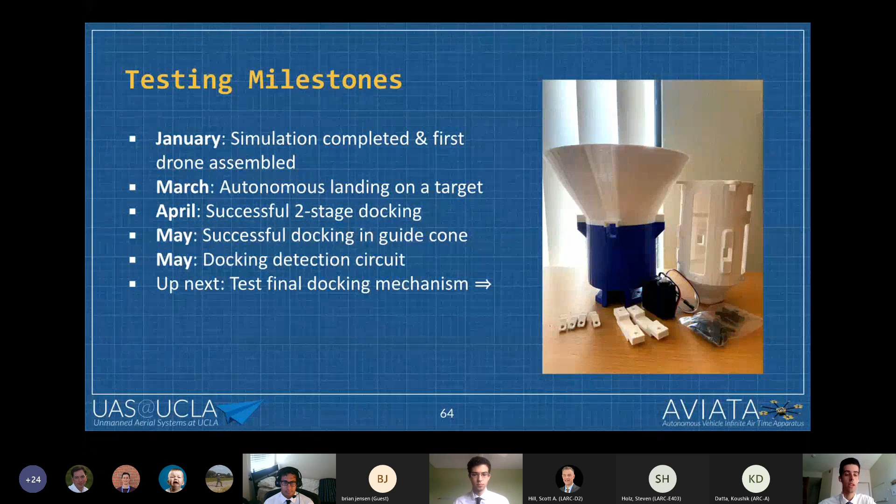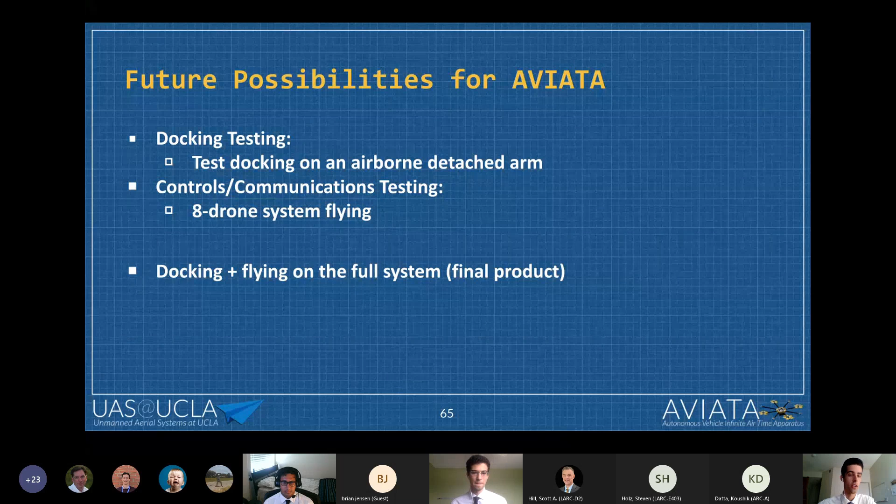So this is a bit of our conclusion, some possible future possibilities: finishing docking testing, as well as getting an 8-drone system flying. Once we get those two, we can finish the final product and integrate everything. The final objective will be to integrate controls and docking for the final product.

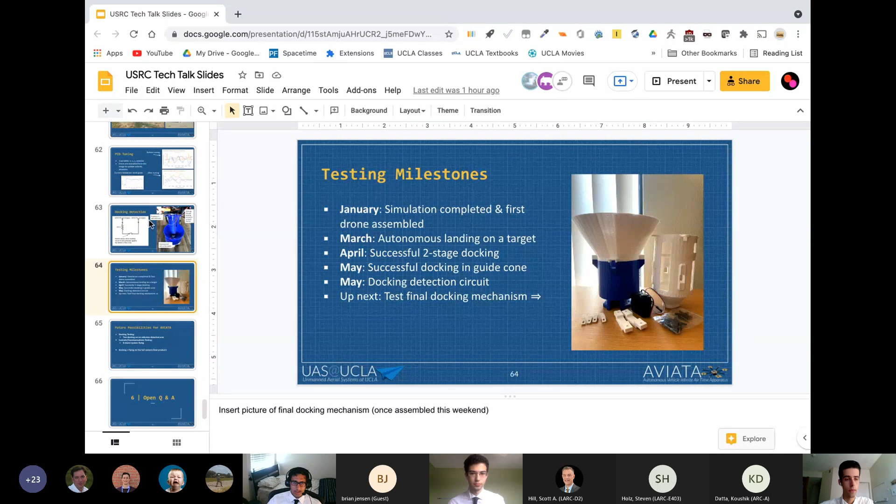The actual envelope is something we're kind of working on, assuming I'm understanding the question properly. But the way it works right now: there's a section attached to the drone with a small egg-shaped alignment feature at the bottom, and a corresponding egg-shaped recess in the bottom of that cone. So the first step is those two aligning, and then you drop into that bottom section, and that's where the electrical contact is formed.

Then there's the cylindrical section above that—there's a cylindrical section in the bottom cone as well, with ridges that pop out on the top section and corresponding recesses in the bottom section. Those lock up the rotation about the central axis. Then there's the final step, not present in this one, where electrical keys are pushed out—this is a slide we showed earlier in the mechanical section—where the 4 keys are pushed out by the servo into those 4 corresponding platforms.

Right now the way it works is just friction and contact force based. We'd like to look into more advanced capturing techniques, like using ratchets or some sort of bistable spring mechanism, or some other system with a more solid lock than what we have, which just cuts off all the different degrees of freedom. If you have any advice for that, we'd look forward to hearing it, because we had some trouble finalizing that during our design process.

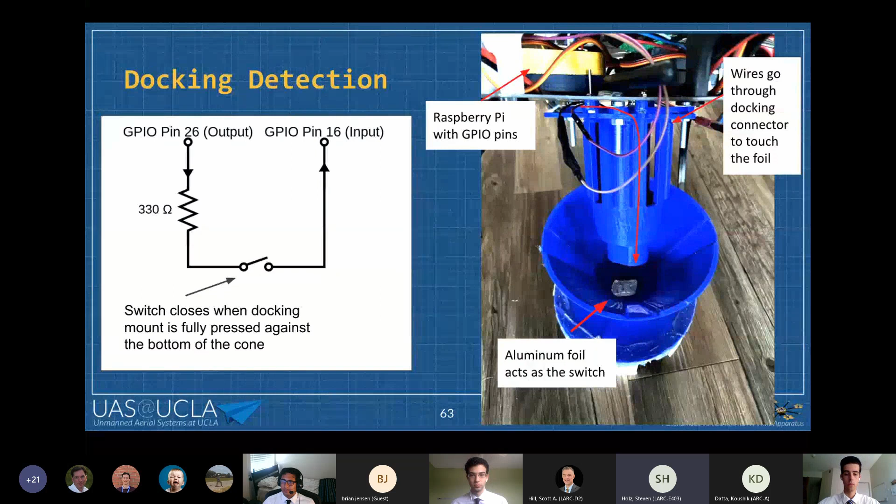Yeah, I don't know if we have time to get to all of those six questions, but if any of you on the team want to answer some of the ones we didn't talk about while we head to the other questions, that would be great. He did comment that there is some NASA work relating to linked aircraft, both multi-rotor and fixed wing, that might be of interest if you haven't already looked at it during your research. I don't think we have, so that's good to note. John, if you can still hear us on the line, if you have any links to those, that may be great for the team to have access to.

Another question was asking how long will this project continue for. Is there any plans to transfer it beyond you all, if you all aren't able to finish it during your time as students? And also, do you plan to present any of this research at upcoming national conferences?

Yeah, so I can answer this one. We don't actually currently have any plans to present this anywhere else, so a lot of the results were actually very recent results. In terms of the future of the project, unfortunately we actually just graduated this past week. There are some club members in UAS at UCLA who are continuing, and so we're planning to write up documentation for everything we've done so far. The project should hopefully continue in some capacity, so in terms of transfer of knowledge, that's what we're planning to do, but we're not really sure of the scope of that transfer yet.